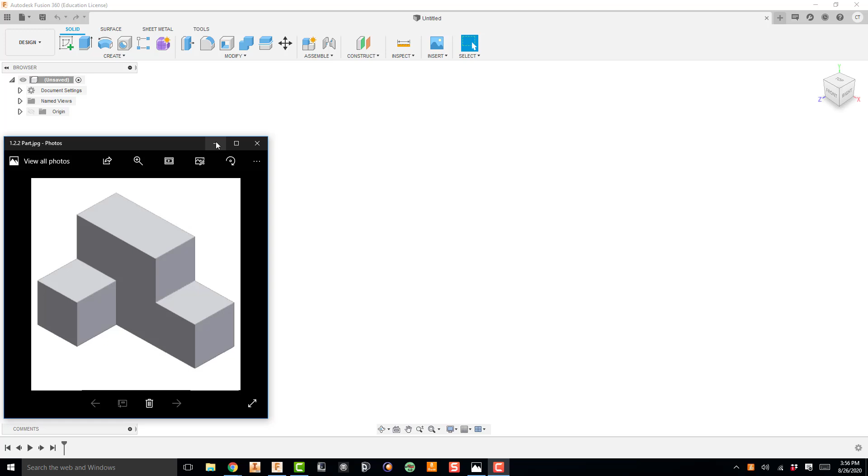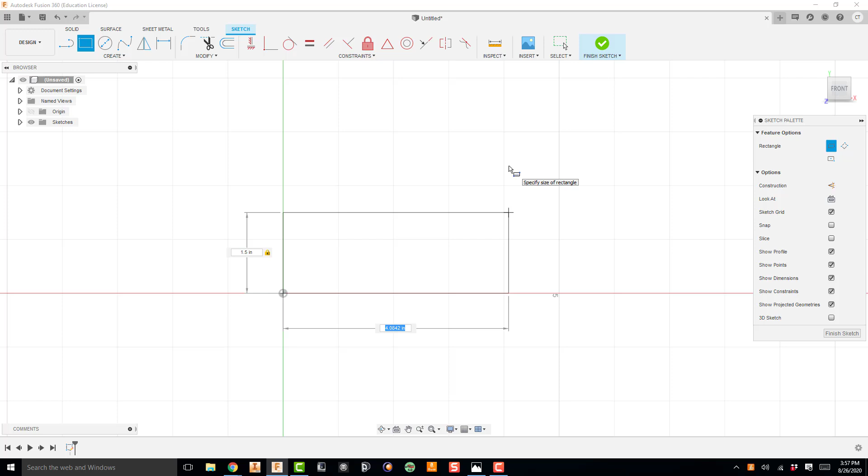So to do the subtractive method, I'm going to start with a large solid shape that this part would fit in, and then I'm going to cut away the areas in order to make the part. So I'm going to minimize this. On a new document in Fusion, I'm going to create a new sketch on this back plane here. I'm going to use my rectangle tool, and I want to make a block or a rectangular prism that part would fit in. So it's going to have an overall height of 1.5. Hit the tab. Overall width of 2.25. Hit enter. I'm going to finish that sketch.

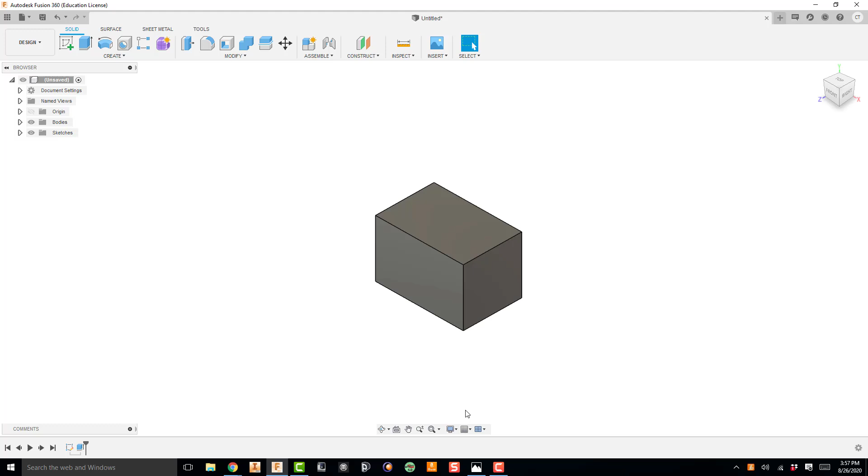Then I'm going to hit E on my keyboard for extrude. Extrude is also up here. And then I'm going to pull that out, and I'm going to extrude that a total distance of 1.5 because that's the overall depth of the part, and hit enter. Now this gives us the rectangular prism that this part would fit within, and now we need to go back and cut all of the areas away. So if we take a look at the part, I think I'm going to start and cut out this Z-shaped area out of the front of it, off of this front face here, and then we'll go back and cut this area here in the back.

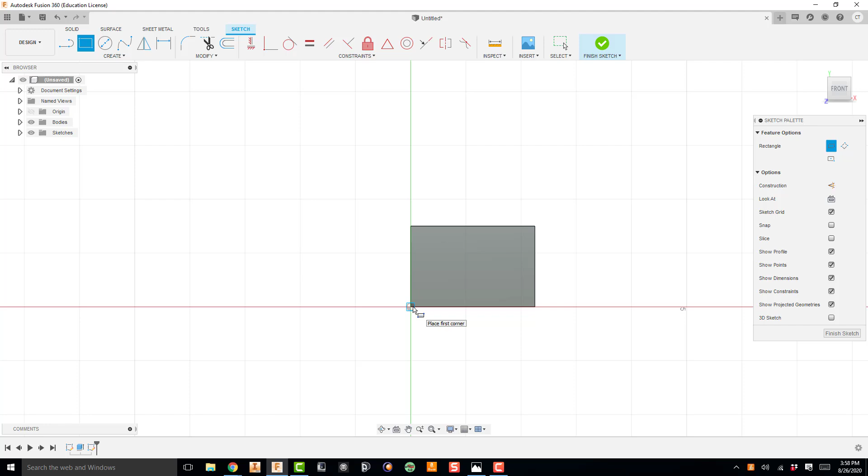So I'm going to minimize that, create a new sketch on this front plane, and I need to make that Z-shape cutout. So the easiest way to do this is to use a rectangle tool and create that bottom left cube that we're going to leave behind, and then we can select the rest of the shape from there. So I'm going to grab this 2-point rectangle, select that bottom left corner, drag, and I'm going to make a 0.75 by 0.75 square. Hit enter.

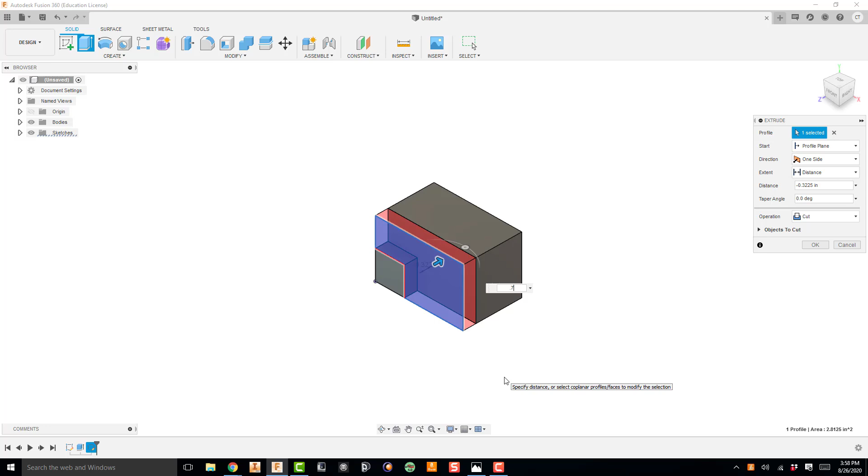Now if I finish this sketch, see this surface here is selectable, so if I hit the extrude key, I can select that face, reverse that and push it back. You see now it's in red as it's cutting away, and I'm going to cut that back 0.75 inches. But if you put in a positive, it's going to make it extrude out and add on to it, so I want to go back into that 0.75 and make that a negative, and then hit enter, and that takes off that front edge there.

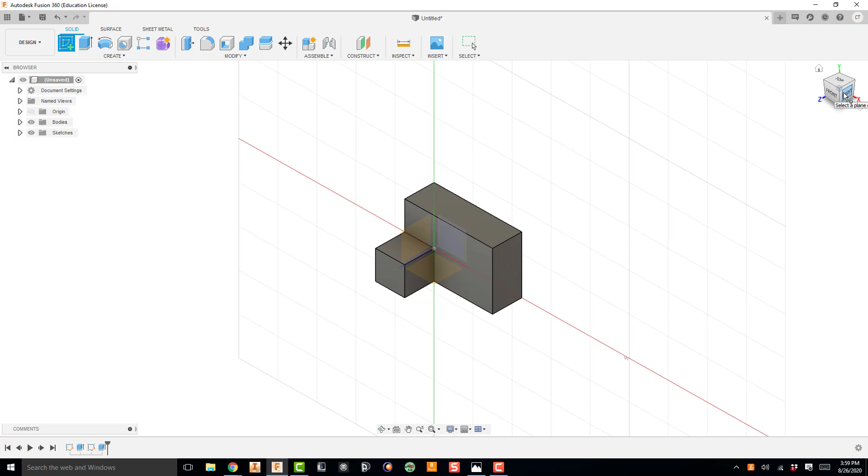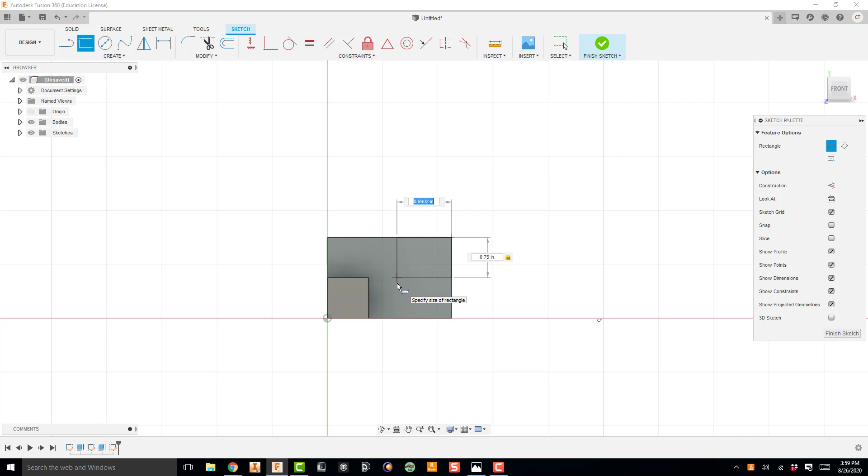And then I'm going to make another sketch, and I could either do this from the back side, so I could flip this part around and do this from the back side here. For me though, I'm going to go ahead, put this back in the correct view, and click on this front face here. And I'm going to grab the rectangle tool once again, click on that top right corner, drag down to the left, make that a 0.75 by 0.75, and hit enter.

And finish the sketch. Click E for extrude, select that face, and then I'm going to push back to start the cut, and I'm going to type in a negative 0.75 and hit enter. Now if I pull up my image, I have made that exact part but using the subtractive modeling method.

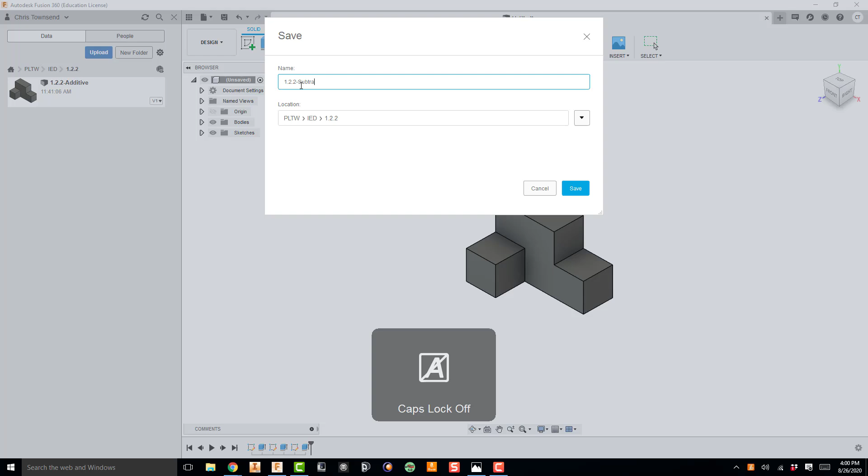And once again, once you're done with this part, we'll go ahead and open the data panel in the top left. Let me minimize my photo first. Open that data panel, and I'm already in my 1.2.2 folder, so I'm going to hit the save button, call that 1.2.2-subtractive, and hit save. Now I have that subtractive part in my folder, and I can move on to the next part, which is going to be a combination of both additive and subtractive modeling.